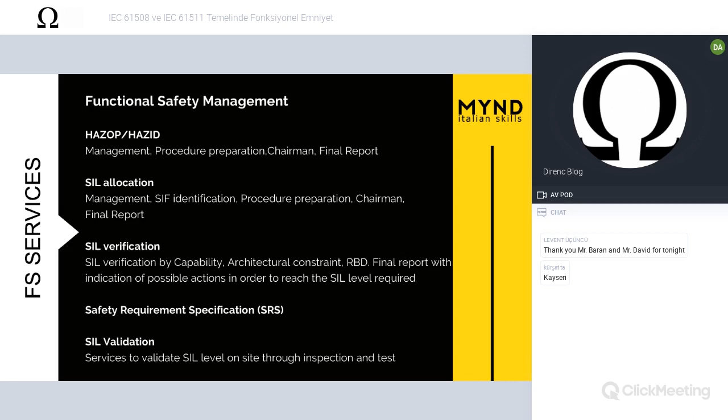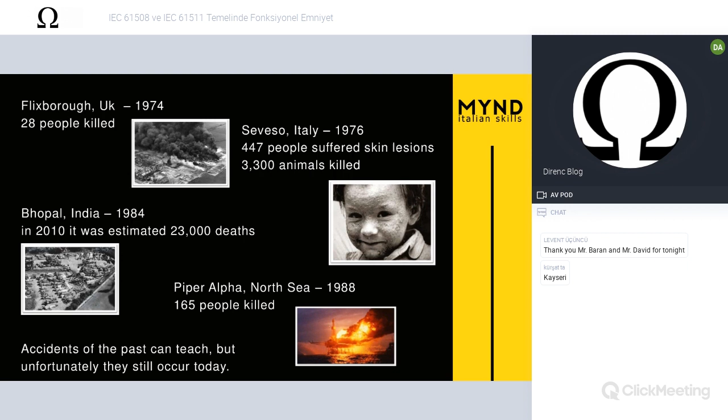Okay, David, thank you for this explanation. Just wondering what happened after the Seveso accident. Okay, thank you, you can go to another slide.

Okay, big question about functional safety. Why should you invest in functional safety? You have to keep in mind that an incident is more expensive than investing in safety.

But if you consider, for example, one operator that is killed by release of toxic material, something different... How do you estimate the people? You cannot. In fact, this estimation I think is very conservative, because it's not possible to estimate life in terms of money. Anyway, training is a way to help people and companies become more aware of safety.

The mission of my company, of myself, and I think also of Mr. Baran, is to help people with training, because we have to learn a lot in terms of safety. Safety is not only functional safety. There are a lot of things about safety - we are speaking about ATEX, about Seveso. There are a lot of things, but together you can realize your project with safety in mind. The standards and good safety engineering in order to help and reduce risk. But if these are applied in the correct way, that is very important.

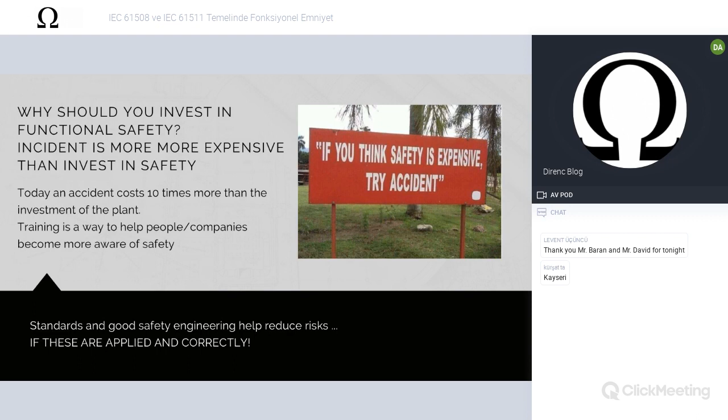Okay, David, you can go on.

Okay, let's set up the study about functional safety. Before introducing functional safety, let me say the first important concept is safety-related system, and inside of safety-related system we have a system called Safety Instrumented System, SIS. Safety-related systems serve the function of protecting equipment and the process where danger may occur in case of failure. Keep in mind that these systems are not part of the process control system. In fact, we normally speak about independent protection layer, independent safety system.

Yes, this is the primary concept you have to keep in mind. The safety device, safety instrumented system, safety-related system, shall be independent from the control system. You have to think: if you make an integration between them, what could happen if you lose the control system? In this case, you lose the control and also the safety.

Some examples of safety-related systems are the pressure relief valve, a mechanical device in order to reduce the pressure inside a tank and something like that. The manual braking of the train in case of emergency. The rupture disc is a mechanical device completely independent from the controls. And also here is a picture of what is normally called a safety PLC, emergency shutdown system. This is part of a safety-related system.

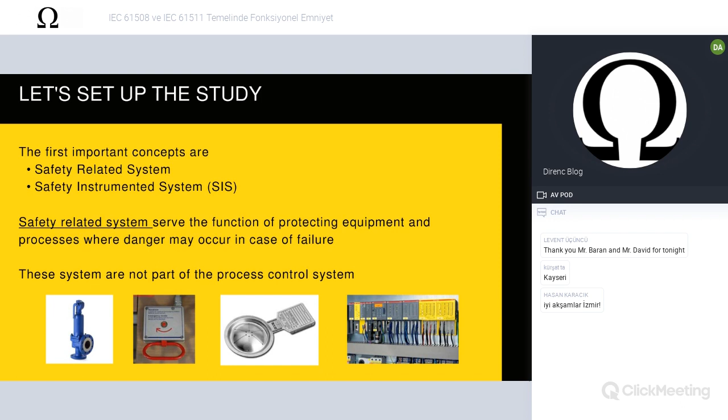Okay, David, just add something in Turkish that people can understand better, because maybe some people are foreign to this system, so I just add some Turkish words. You can go on your slide. Okay.

Safety instrumented system, as I told you before, is a part of a safety-related system. SIS consists of any combination of sensor, or called also transmitters, logic solvers, and the final elements.

So the sensor measures the value like level, pressure, temperature, something like that. Through logic solvers, where that is the intelligent computer, PLC, something like that, with a program, application program for standard, is called. And the final element, that is the element that drives the process in a safety situation.

SIS corresponds to the set of all instrumented safety loops of the system. Here you can see the simple sketch of the SIS. Anyway, you have to imagine all your plant, all safety loops connected to the safety PLC. So we can have one or more than one sensor. One logic solver normally is enough because the reliability, design, and performance of the logic solver is very high in comparison to the sensor and final elements.

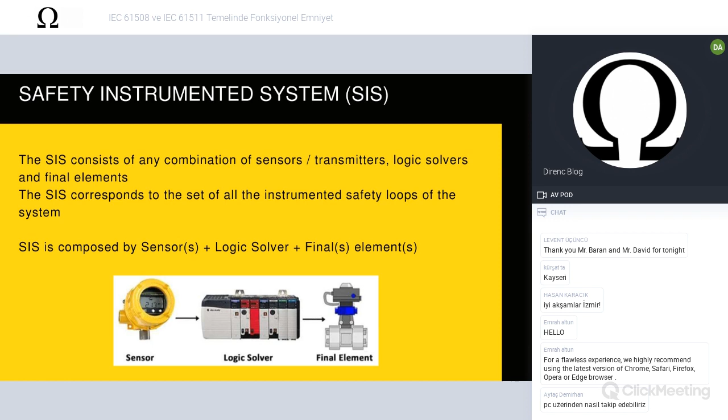Okay David. Okay, in this slide, just to show you the SIS representation, you have, as I told you before, all the sensors connected, the sensor for the safety purpose, connected to the logic solver and final element. So we can separate by subsystem: initiator or sensor, subsystem logic solver, and subsystem final element. And then we can define SIF as a safety instrumented function.

For example, in a system, these instruments measure the pressure in order to avoid overpressure in a tank. So when it reaches the high level of pressure, through the logic solver, it drives the process or closes the line for inlet of the tank through one valve, for example this valve. So in this case, I select one safety instrumented function inside of the safety instrumented system with the purpose of avoiding any overpressure in the tank. The SIF, in this case, will be composed by this sensor, the first one, the logic solver, and one valve as a final element.

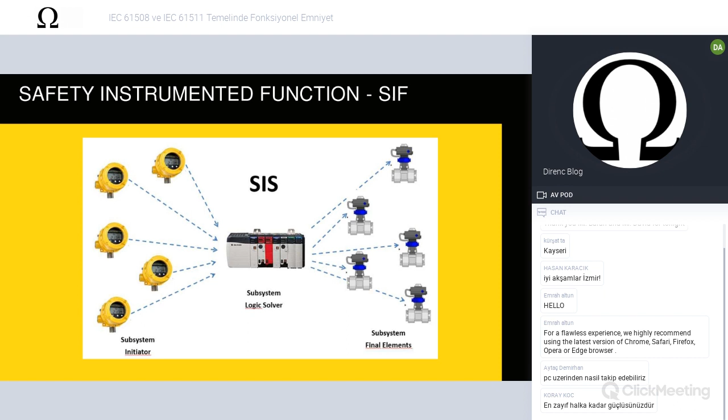Okay, David. Well, now we can define functional safety. Functional safety is a part of the overall safety related to the process and the basic process control system, that is the system provided in order to control. One part of the BPCS is, for example, DCS, okay? That depends on the correct functioning of the SIS. More simply, functional safety is the reduction of risk provided by the instrumented function, implemented in such a way to ensure safe operation of the process and to avoid.

Normally, we have to define three different consequences, such as injury or death of humans, so safety for people; spills to the environment, so safety for the environment; and the loss of equipment or production, that is safety from the economic point of view. Keep in mind that 100% functional safety will never exist, as we are dealing with components that can fail. Also the SIS, which is normally installed with real components, can fail. We have to establish the probability of failure, that is the performance level of the safety loop.

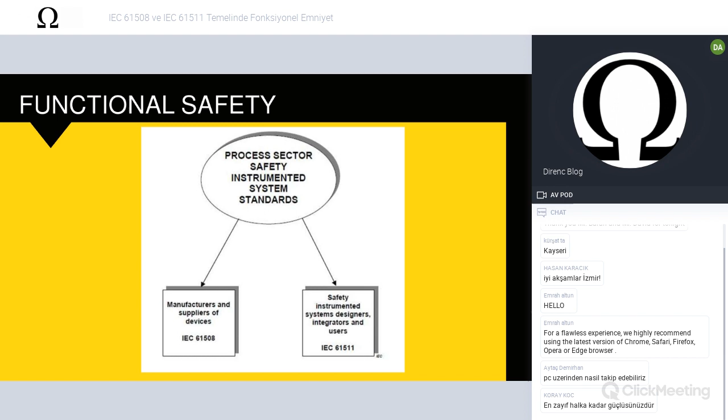The 61508 is also called the umbrella standard, the mother of the standards related to functional safety. In fact, 61508 was the first standard related to functional safety, and the definition of functional safety was included for the first time in it. From 61508, committees generated standards for different fields, such as the process industry with 61511, machinery with IEC 62061, and railway. There are many standards related to functional safety for different applications.

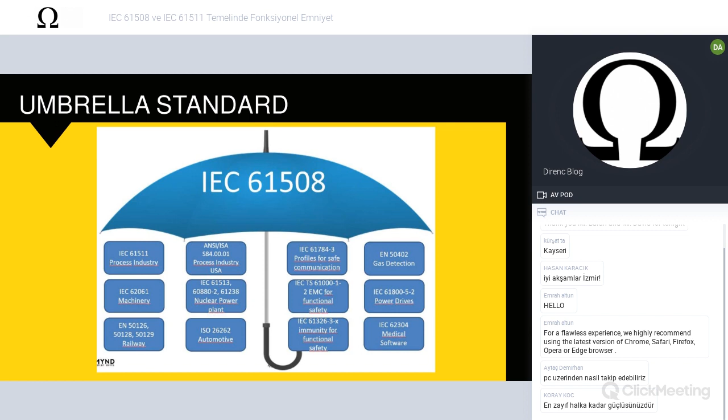Okay David, thank you. Here the front sheet of the 61511, now in revision 2, released in 2016, following the latest revision of 61508. The title of the standard is Functional Safety, Safety Instrumented Systems for the Process Industry Sector.

What is the process industry sector? All the factory companies where, from raw material, due to some mechanical or chemical transformation, at the end provide the final product — for example, from ethylene to plastic, from crude oil to gasoline, everything. Wherever there is process and transformation, this is the implementation of 61508 for the process sector.

The standard, now in revision 2, applies to SIS, Safety Instrumented Systems, to be installed in the process industry. Şimdi biraz önceki slaytta şeyden bahsetmiştim.

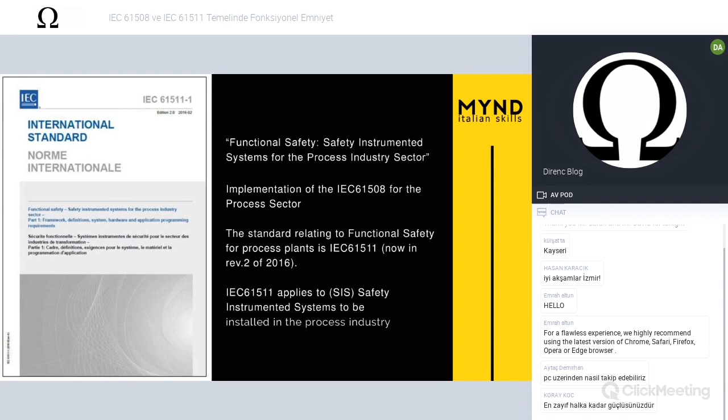In 61511, there is a description of how to perform functional safety, and the approach is described by a life cycle. Life cycle means that if you want to comply with 61511, you have to respect each stage as reported by the standard. From the top to the bottom, you have to respect all the activities, and provide the documentation as requested by the 61511 life cycle.

Let me change the pointer. The first zone here is what is called risk analysis and definition of a safety instrumented function. The second zone here is what is described as SIS design, installation, and validation. The next zone is related to operation, maintenance, and decommissioning on site. So from the top, that is the designing phase, concept, analysis of risk. We design a safety instrumented system, we install it, we test it, we maintain it, make some modifications if requested, and also decide how to dismount the safety instrumented system.

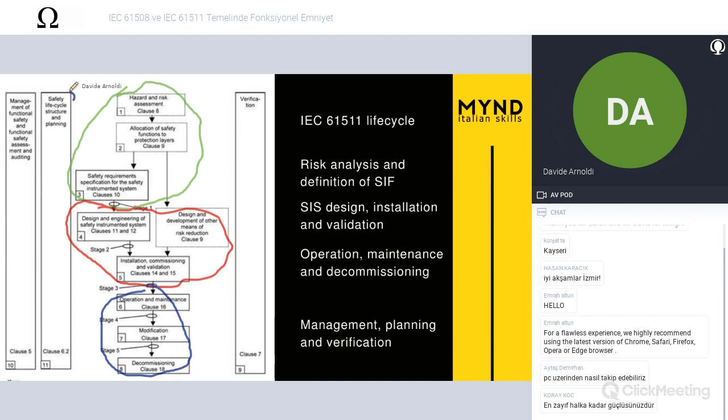On the left and right side here and here are the management, planning, and verification — meaning how to manage the functional safety, how to verify the functional safety, how to respect the functional safety in my project design.

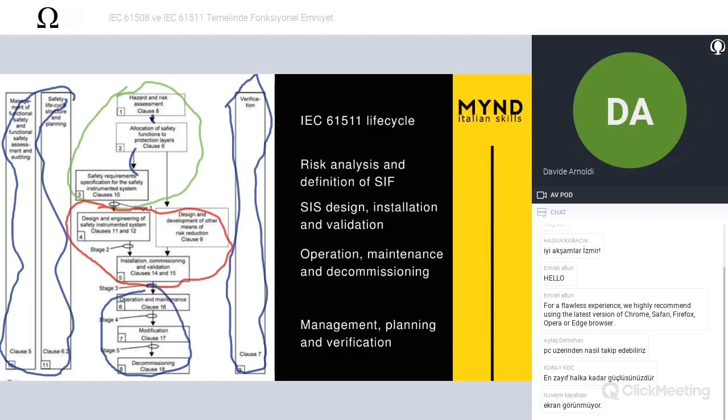Another question: some manufacturers, representatives come to your site, your factory, and say you need this equipment, this design, you need to install this system. That means that's not correct, I think, because before that you should make a risk analysis and you should define whatever you need about SIF. Is that correct what I say? Yes, it's correct. I will explain later step by step with some example very fast, because I cannot spend a lot of time, it's very late also for you. But anyway, what you say is totally correct.

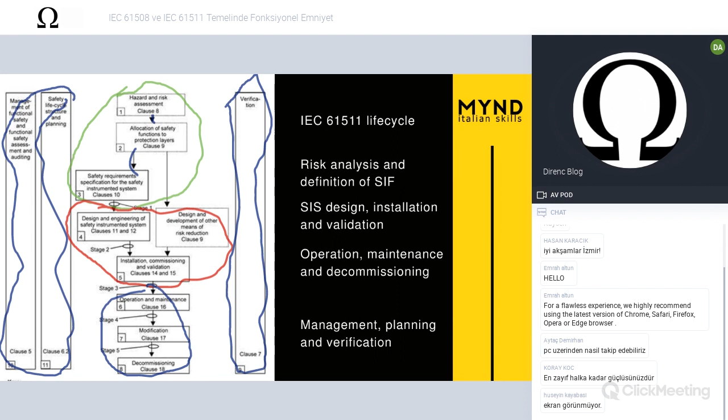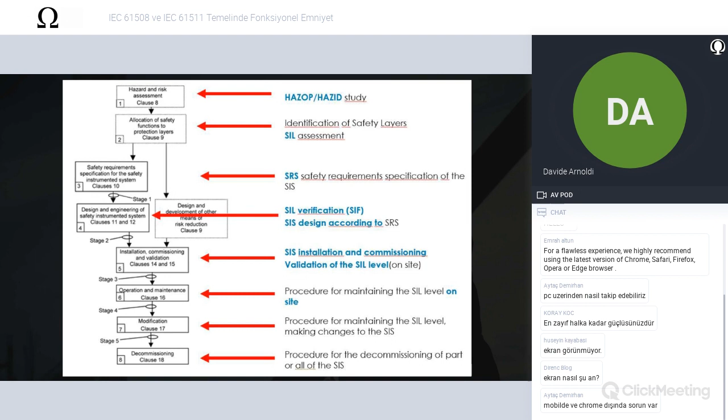In detail, the life cycle meaning is step by step. The first one is hazard and risk assessment - we know very well about the hazard study, the methodology in order to define any risk and consequence. The second is identification of safety layer and also allocate the performance level. I will explain very well about the SIL, what is the meaning of that. Safety requirement specification is now mandatory before the performance verification of my loops. So if you want to be compliant with the standard, you have to provide a safety requirement specification. Then, therefore, we have the installation, procedure for maintaining the SIL, procedure for modification, and also the decommissioning.

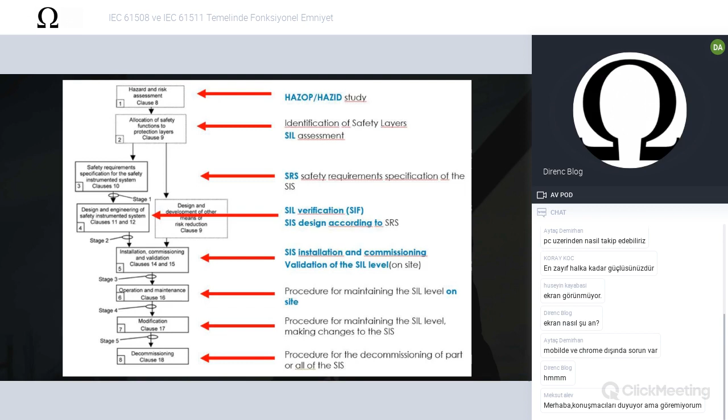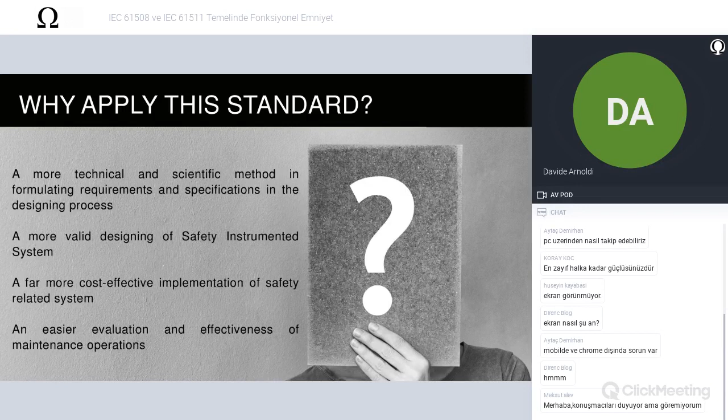Why apply this standard? First of all, we can speak a lot about experience. Experience is needed, is requested for any project for control and safety. But now we have a standard that can help in order to reach as much as possible a very good reduction of risk. In my experience, I saw a lot of misunderstanding, something like that. Some designers were installing, for example, some instrumentation device like partial stroke test - that is a diagnostic test for the valve. This partial stroke test is requested only if validated by the SIL verification. To spend a lot of money in order to put a lot of hardware for diagnostic purpose can, vice versa, decrease the performance of my safety loop. So only by following the standard, the 61511 standard, can you design the SIS in a correct way.

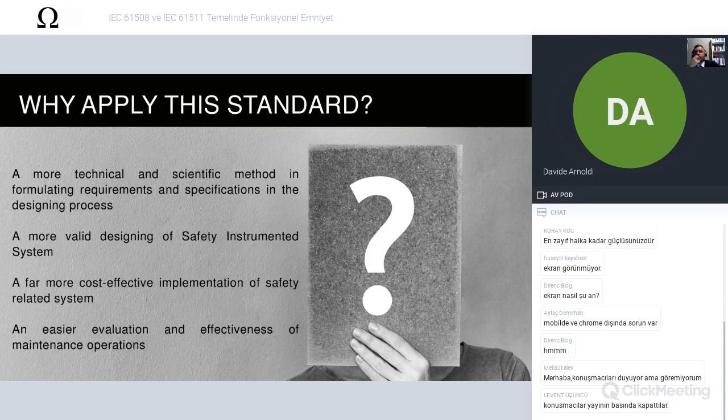Bu standardı neden uygulamalı ile ilgili bir slide bu. Bunu anlatıyor David. Öncelikle bir tecrübeden, hani biraz önce de bahsetmiştim, 88'lik kazadan sonra işte 61508 böyle bir fonksiyonel emniyetle ilgili bir standart gerektiğinden bahsederek yola çıkarak sistem böyle işliyor diyor.

Öncelikle kural temelli belli bir kurallar zinciri var ve bu kurallarda tabii ki bir tecrübe üzerinden gidiyor. Bu başka bir sunumun konusu olabilir ama kısaca toparlayayım. Standartları kafalarına göre yazmıyor kişiler. Tahmin ettiğiniz üzere sektörün mühendisleri, bilim adamları, sektörün içerisinde olan çeşitli kurumlardaki kişiler bir araya geliyor. Çeşitli kazalardan sonra olabilir bu ya da çeşitli ihtiyaçlardan sonra, tabii ki hepsi bir ihtiyaç. Bundan sonra bir araya geliyorlar, oturuyorlar ve çalışıyorlar. Dolayısıyla bu standardın uygulanmasının gerisinde maliyetin efektif olarak uygulanması, bir tecrübe ve bunun tasarımı gibi çeşitli unsurlar var diyebiliriz. Genel bir ifadeyle söyleyebilirim. Okay David.

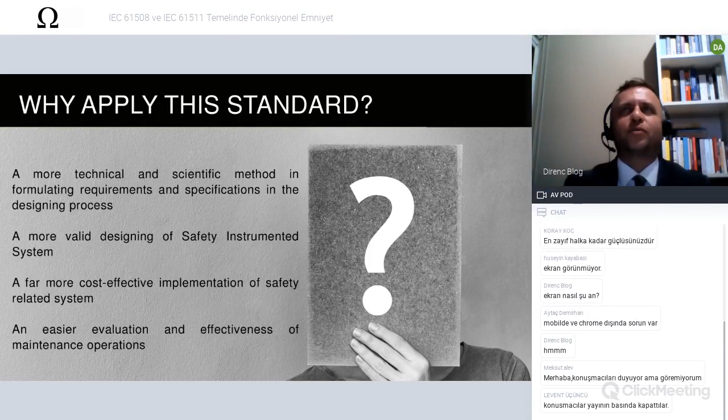The target of functional safety is to reduce the risk as much as possible. First of all, we have to identify the risk and if the risk is tolerable or not. How to define the tolerability of the risk? For example, in my plant, I cannot tolerate any injury of people. So with some guidelines you need some experience in order to perform a tolerable risk and not tolerable risk assessment. Anyway, this zone is normally defined before starting any activity of risk assessment.

Then we have different devices or safety-related devices. The control system is a safety device in the term that it can reduce, for example, the control of process value. Alarm management system is a method in order to manage the alarm and give a credit in terms of risk reduction. SIS is the scope of my functional safety, and we can have mechanical independent layers such as PSV, pressure relief valve, and so on.

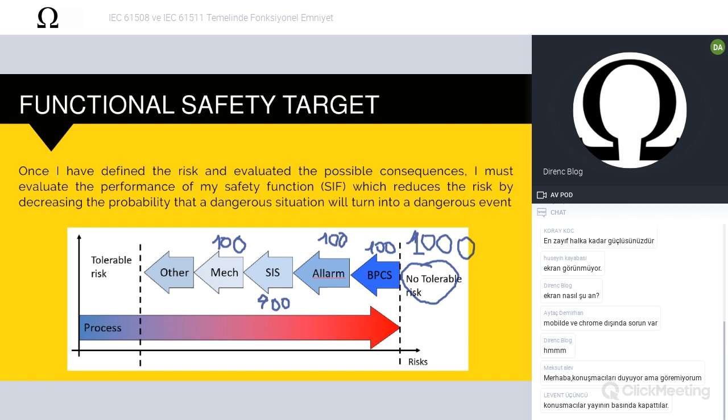Okay, David. Okay, I would like to skip the next slide because it's too long. The important thing for me now is to define a prevention and mitigation layer. As per standard, there are two main groups related to the layer, safety layer. The first is the prevention layer, where we can find the process design plant. If the process design is realized with the safety in mind, it could be a prevention layer. BPCS also is a prevention layer. Before everything, the BPCS tries to maintain the process value in the safe range.

Alarm management system is also prevention layer. A correct alarm management system can decrease the risk for any dangerous event. Safety instrument system is here, okay, and the physical protection like a rupture disc is a pressure safety valve and so on.

Then we have the other group called mitigation layer. Prevention layer's scope is to prevent and reduce the dangerous event. Once we have the dangerous event, there is nothing to do. The only possibility is to mitigate the consequence using a mitigation layer, as physical containment like dike, scrubber and flare.

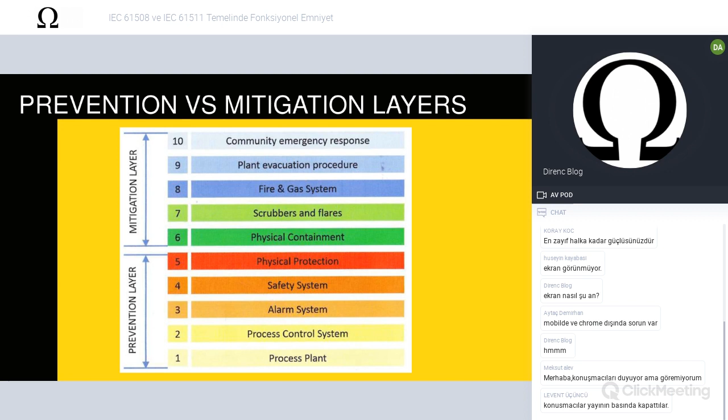Performance level in the process industry standard is called safety integrity level. The safety integrity level is defined as a relative level of risk reduction provided by the safety instrumented function, or to specify a target level of risk reduction. Safety integrity level is introduced by the first standard, IEC 61508. SIL is a measurement of performance required for a safety instrumented function. We have 4 different levels, from SIL 1 to SIL 4. SIL 1 is the lower, then SIL 4 is the higher.

SIL 1 means lower risk reduction factor, means low reliability of safety function. Instead of SIL 4 that is, let me say, very, very complicated to realize safety instrumented function by this level of risk reduction. That means that with the failure of safety function, the consequence is very, very high.

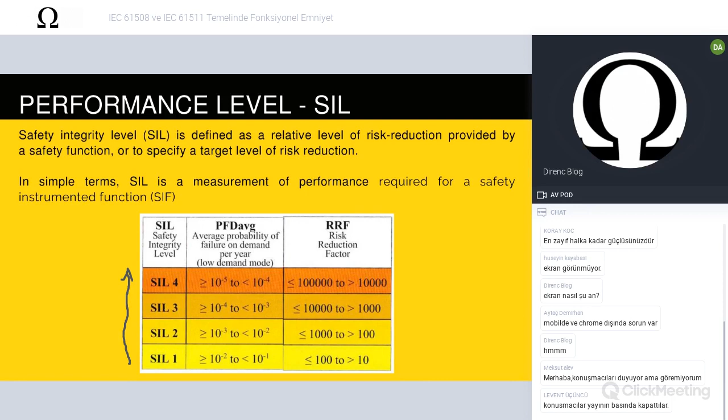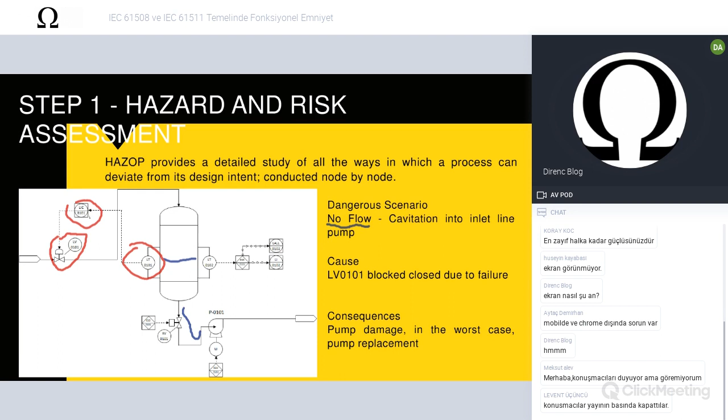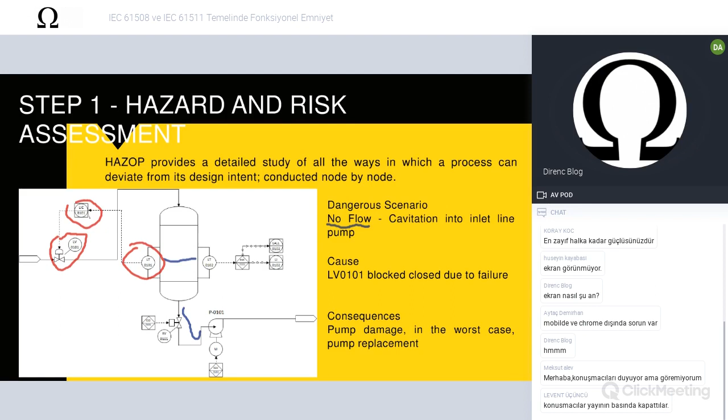Okay, so we realize the hazard and risk assessment, step 1 of the life cycle. Step 2 is to perform the SIL allocation. SIL allocation is assigning a level of performance to my safety instrumented function.

You want to translate or I can continue, Baran? And you can continue, you can continue.

Therefore, in order to protect against cavitation in the inlet line, a safety function is already installed, composed of the sensor LT0102, and a logic solver which could be a safety PLC completely independent from the BPCS. When the level reaches the low trip point, the interlock inside the logic of the PLC activates the de-energizing of the motor of the pump, in order to stop the pump and protect it from cavitation.

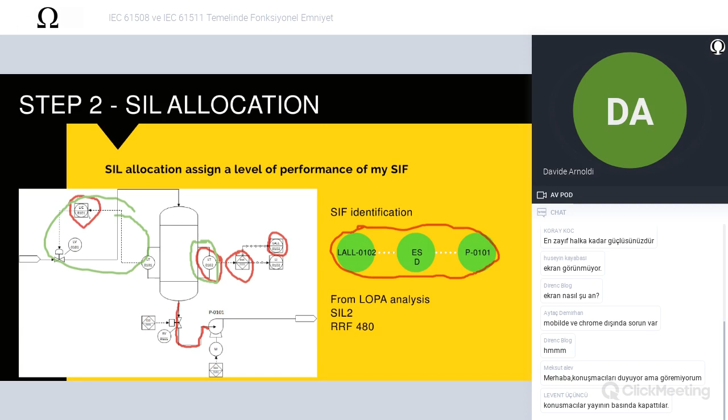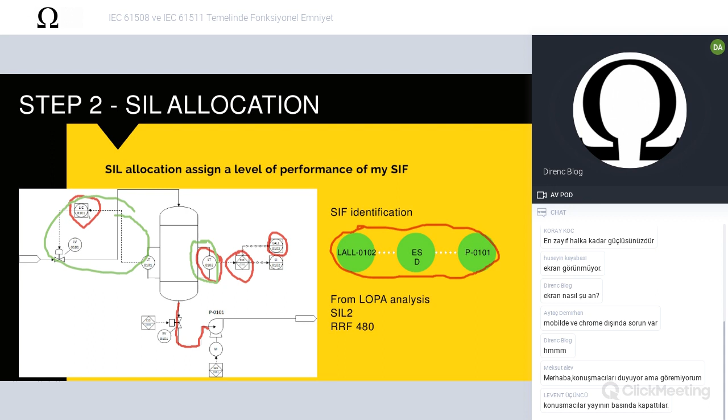Hani biraz önce 1000'den 100'e azaltarak gitmiştik, o basit bir gösterimdi, sadece konunun anlaşılması için verilmiş bir örnekti, hesaplamaya dayanmıyordu. İşte burada da bir koruma katmanı analizi yapıyorum diyor ve buradan aldığım sonuçla azaltmam gereken faktörün 480 olduğunu hesapladım diyor. Bu bir hesap yöntemi arkadaşlar, çok detayına girmeye gerek yok. Ve bunun SIL 2 seviyesinde bir sistem kurmam, yani Safety Instrumented Function'ın, SIF'in, SIL 2 seviyesinde olması gerektiğini hesapladım diyor.

Okay David. Then the third step is to provide the safety requirement specification. It's a sort of data sheet for my safety instrumented function. For each SIF standard, it's required to collect all information into a specification. It's not a specification in order to purchase the device, it's a sort of history of each safety instrumented function.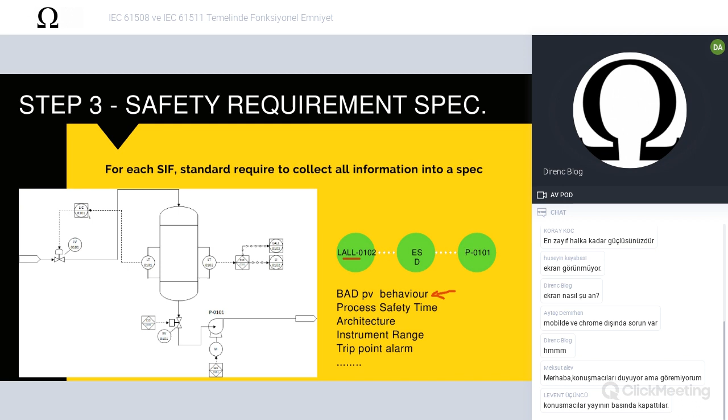Yani biz burada insanların hayatından bahsediyoruz, David dedi, ve şunu da söyledi: bir şekilde yetkin - bu kelimeyi unutmayın - yetkin kişinin bu bilgileri, bu belgeleri toplaması ve temin etmesi lazım. Başka bir açık kapı bırakmadı. Buradan çıkartacağım sonuç şu olmalı: hemen tesislerinize dönüp, bizim bu ekipmanlarla ilgili verilerimiz, belgelerimiz, kağıtlarımız, spesifikasyonlarımız nerede diye sormanız gereken ilk şey bu olacak diye düşünüyorum.

Okay David. Okay, the fourth step is to provide and to make a SIL verification. For each SIF with the SIL more than 0, so means SIL 1, SIL 2, SIL 3, SIL 4, you have to verify the compliance of the SIL level assigned.

In this case, our function from the SIL allocation was... this function must respect the SIL 2 requirements as per standard.

We have to verify this. How to verify? We have to calculate and validate 3 different barriers of SIL. The first is SIL by systematic capability. The SIL by minimum of architectural constraints, meaning how many devices I have to install - redundancy increases the performance of the function. The last one is SIL by probability of failure on demand. All 3 of these design barriers must achieve or exceed the target SIL level. The worst case, so the lowest SIL, determines the SIL level for the SIF.

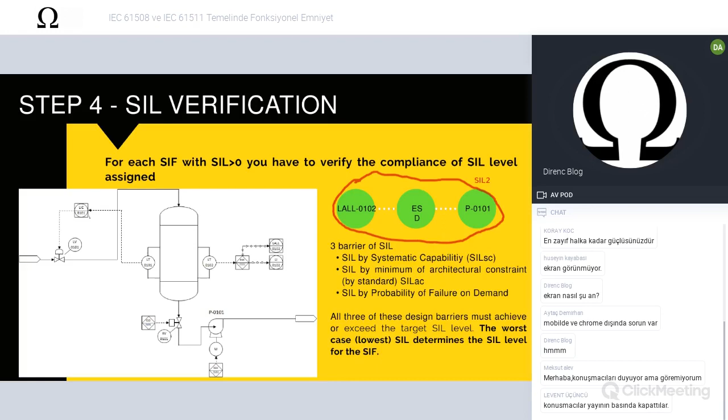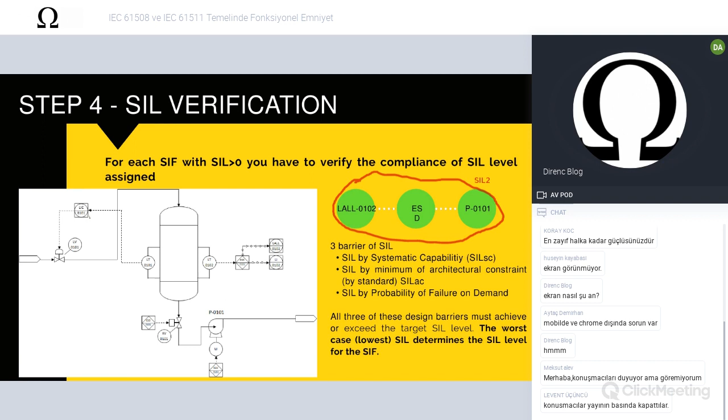Okay, just to underline about the systematic capability - what is it? The systematic capability is normally called the SC level of a device. Systematic capability is a measure of design quality that shows sufficient protection against systematic design faults. The systematic capability is divided into 4 different levels, equal to the SIL level. For example, if product systematic capability is SIL3, the development process is considered to meet the 61508 functional safety for device SIL3 requirements.

So what does this mean? It means that in my function that is SIL2, I have to purchase and install a device with systematic capability equal to or higher. I cannot install a device with systematic capability SIL1 - it is not in functional safety compliance. Where do I find the systematic capability? Normally when you receive the certificate of compliance, be careful because it's not SIL certification - there is no SIL certification for a device. The certification is for compliance with 61508, that is the certification. So in the certification, normally it states systematic capability, SIL3 capable - that means you can install the device in a SIL3 function.

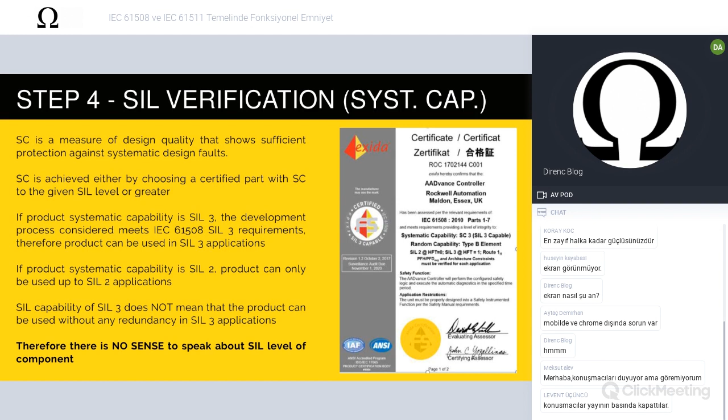Okay, step 5 is what is called SIL validation. So for each SIF with the SIL level, you have to validate the SIL level during the factory acceptance test of the logic solver, installation and commissioning. And to do this, you need a competent person. There is no certification - the standard for functional safety doesn't speak about any certification for people, but there are requirements for people to be competent in functional safety.

That is very important. Anyway, the goal is to test the SIS device to ensure that the requirements defined in the safety requirement specification are met. So we also have to test the device. How often do we test the device? The test interval is directly proportional to the probability of failure on demand. That means you calculate the test interval during the SIL verification.

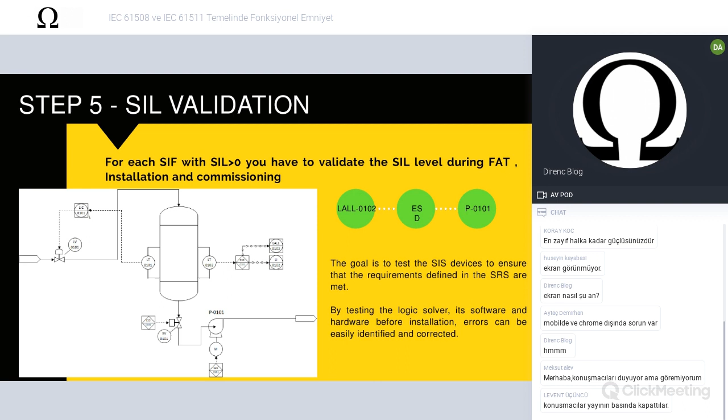The step 6 is operation and maintenance. We have to maintain the SIL level during operation maintenance. As per standard, you have to provide the procedure for maintenance and also the test, and any modification should be procedured. Everything is to maintain the performance level of my safety instrument and function.

Think about what can happen if, for example, the sensor fails. If the sensor fails, that means if I reach the low level, there is no way to avoid cavitation, so the pump replacement happens as per HAZOP.

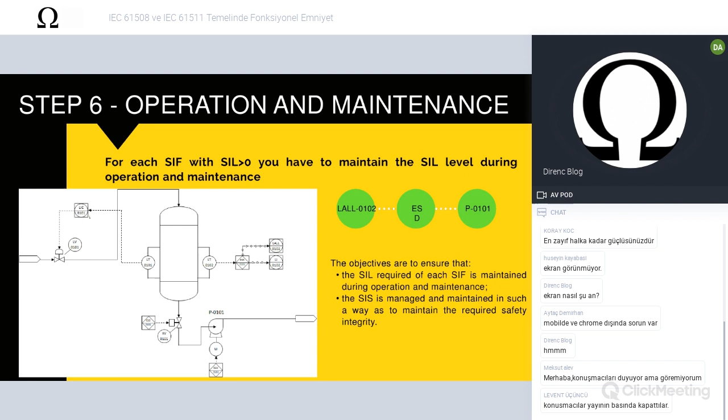Now, I know that this webinar is just an introduction on functional safety. I can explain in more detail during my training. Anyway, functional safety issues and normal functional safety problems: the company performs only HAZOP. As per my webinar or per standard, HAZOP is related to defining the risks and the consequence, but it's not related to how to design the SIS. For that, you have to provide the next steps such as SIL allocation, SIL validation, SIL verification, everything for reducing risk. The second point could be: HAZOP and SIL allocation are provided very well, but how do you design and select these components according to the SIL level if SIL verification and safety requirement specification is not provided?

You cannot. You can provide only by experience, but probably you invest too much money for the safety function. The third could be: HAZOP, SIL allocation, SIL verification are provided. That's okay, very nice, but you have no compliance with the functional safety standard, because you have also not provided safety requirement specification and no validation on site.

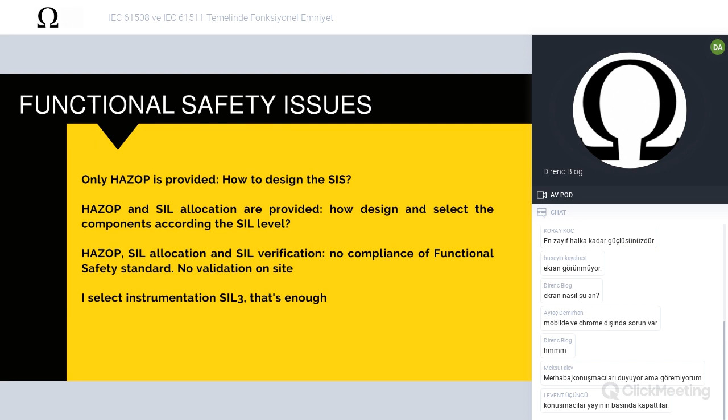Okay David, okay. So at the end of this webinar, I would like to remind you of the next appointment for the HAZOP and functional safety training course. We are fixing it for April, May 2020, will be clarified in future. It's 4 days related: 1 day for HAZOP workshop and 3 days for functional safety for the process industry. Detailed, and also using a real example exercise for functional safety.

Okay, David, one question can I ask? Do you have time? Just one minute.

So the companies in Italy provide the people, the operator or safety people in the company, training about process safety. Which type of trainings do they provide? For example, functional safety, HAZOP. I'm talking about the operator company's safety responsible people.

Well, there are so many trainings about safety. Let me say that functional safety is a complete matter for the safety purpose, for the safety loops. All people involved during detailed design, commissioning, operation, maintenance should know about functional safety.